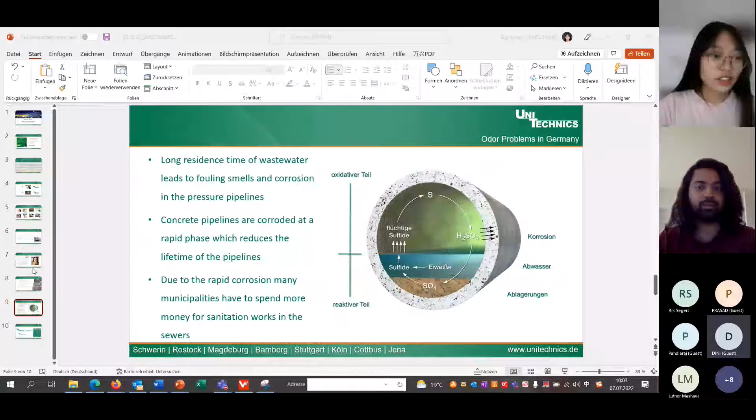Yeah, great. Actually, I have prepared a small presentation with some questions regarding today's topic. Let me share my screen so that we can learn from each other by looking at these questions.

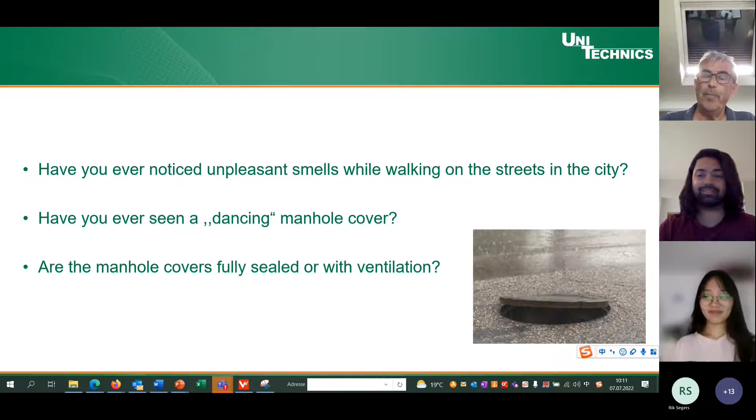But we never realized that we had a nice technology. We always think that maybe there's something more that we can do. I worked with Berliner Wasserbetriebe, and I was with Veolia for 14 years. When they got in there, we were always a leg ahead in which technology and how to do it, but I worked in England mostly, more than in France, and England was also at the forefront.

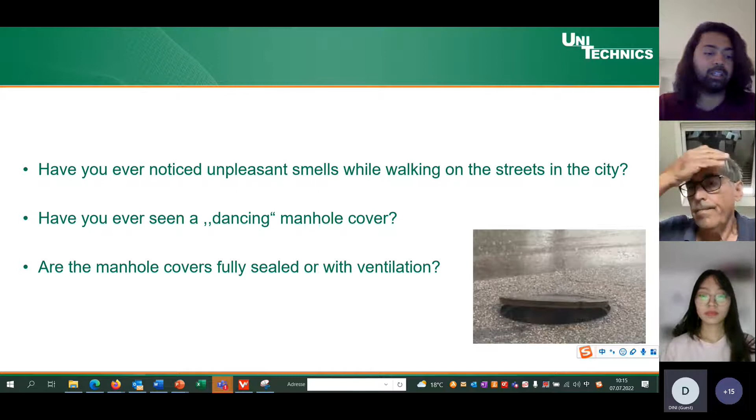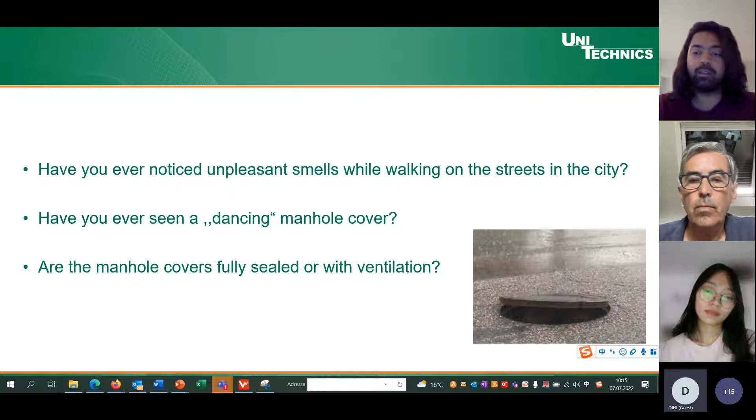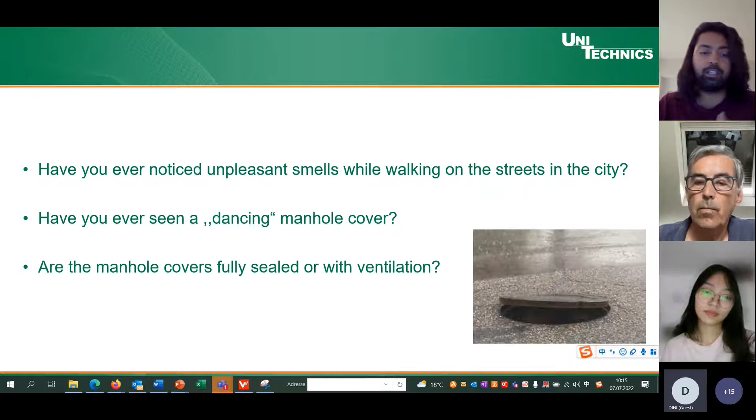So, like I said, we just want to know how it's going. Are there any other different methods that people are using? That's the basic approach in Germany - we mostly use dosing with a chemical, and now due to recent situations in the world, the chemical we use for dosing has become extremely costly. So it's very hard to do the dosing and have a financially good process suitable for the customers or for government organizations. So that's what we generally do in my company, in Germany.

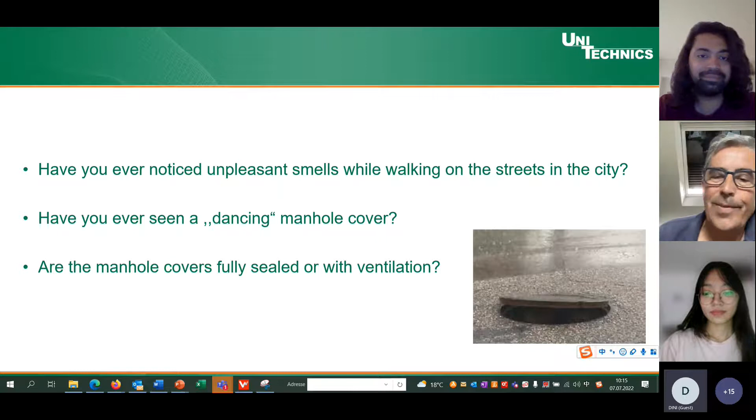So yes, and I have a question to you guys. Does any country have a hole in the manholes? I mean, holes in the top of the manhole cover, like in other countries. Anyone?

Yes, do you hear me? It's finished in quite a few countries, the hole. Now you just have a little thin hook - you get a little hole and you can lift the manhole without the hole. I do know a lot of areas where it's not allowed to have a hole, especially where you seal the manhole because of security issues around buildings against terrorism. It all started 20 years ago whenever an American president would come, or you had a NATO organization, you had to seal the manhole. Now in quite a few countries, from Romania to Trinidad to France, you've got sealed manholes in risky areas.

That's an interesting aspect, I've never thought about that. And then you have cities like Paris where you walk in the sewage in most areas because you've got the water pipes, the telecom pipes, and all that, so there is no manhole - well, limited manholes only in the side streets. But the security aspect is becoming fundamental.

Here are some photos I found in Germany. You can see all these manholes have some ventilation holes, nearly everywhere here. And where I come from, Wuhan - I think maybe everybody knows it now - in my city, I have never seen such a manhole cover with a ventilation hole.

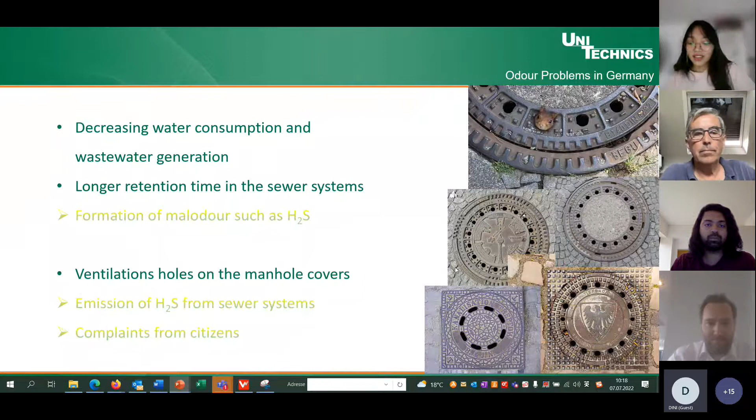With the ventilation hole, maybe you make one problem not as severe. Well, maybe you release one problem, but the other problem will get a little more severe. So it's a question of which problem is more important to us, and what we should do to somehow deal with both of them.

I never noticed you can have manholes without covers before. In my country, there are no manhole openings - we close them completely so the odor doesn't come out and give unpleasant experiences to people on the streets. Instead, we use huge flushes with air and sometimes water, cleaning the manholes completely once every few weeks or once a month, flushing the whole system from all the sewers and pressure pipes directly so it doesn't stay long, avoiding the need for open manholes while still getting aeration.

They also open the holes at night when no one is awake - that's another process I know of. But since it's a different country, the climatic conditions are different because it's very hot there, and some countries in Africa and maybe South America have similarly warm temperatures.

We learned in a previous wastewater talk that in some places in Morocco, they don't have manhole covers, and the sewer structures are slowly eroding and corroding inside. They're not allowed to have any person or food stalls near the manholes, because even when fully covered, you can still get the odor - the H2S has a huge impact, and it's sometimes very dangerous. In some countries they don't even allow you near that street because it's harmful for your health.

H2S is not the only main thing - it's the one everybody knows about that forms odor in sewers. But there are also new gases being studied, like methane and others forming in sewers these days. Methane is explosive and very dangerous, but most people don't have much knowledge about that in sewers. Our company is researching this, and we're finding things that surprised me - some gases are even more harmful than H2S. There are different gases more dangerous than H2S.

I realize we kind of already started the main topic of this episode.

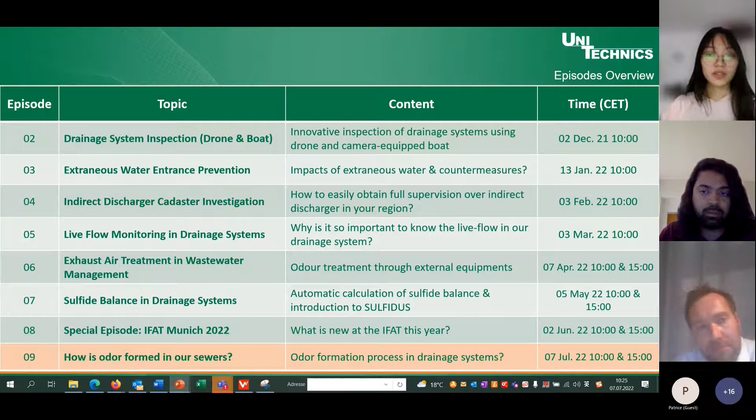And a short introduction, I prepared a little bit about our topic today. You want to share your screen? I can go in and say a little bit to our topic for today. We said we wanted to talk about how odors are created in sewers. That's the topic for today.

And you see a blank screen now. Hopefully all of you. It's a notepad, a paint document, the paint pad.

I wanted to have a little bit of interactive discussion with you guys, and wanted to ask you guys, where are odors created? Is it created at the moment in sewers? Who can tell me where do you think odors are created in sewers? Maybe write it in the chat, and I will make a drawing in this blank sheet, and we can discuss it a little bit.

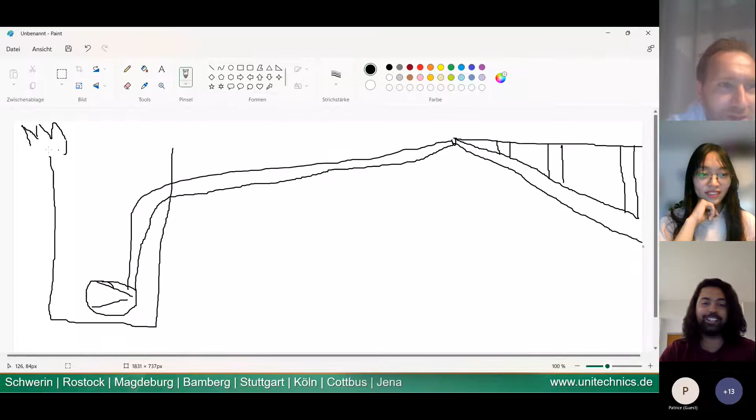Correct, and also you say here is maybe like a factory. My drawing is not that perfect, but that should be a factory - it's okay, you're not an artist, Klaus, it's fine. Okay, and the factory puts wastewater into the pumping station. And there can be smell, for example this water can smell, and the pumping station itself can smell, right?

And also with the pressure pipe, you mean like here, right? Yep, like from the manholes. Okay, so where is it now that the smell is created? So where is it created, how does it work, do you know? Does somebody have a clue how this gets created?

I mean, if you put in already stinking water, then that's like a chemical process in the industry. But most odor problems come from the sewer system itself. So basically, does anybody know how, for example, H2S - we already heard this - how is this created in the sewers? Does anybody have an idea here? He wants to share, maybe.

That's the goal for today, to together find out how it works, to make a concept and a drawing here, and then afterwards you all can print it out and hang it onto your wall and forever know how it works.

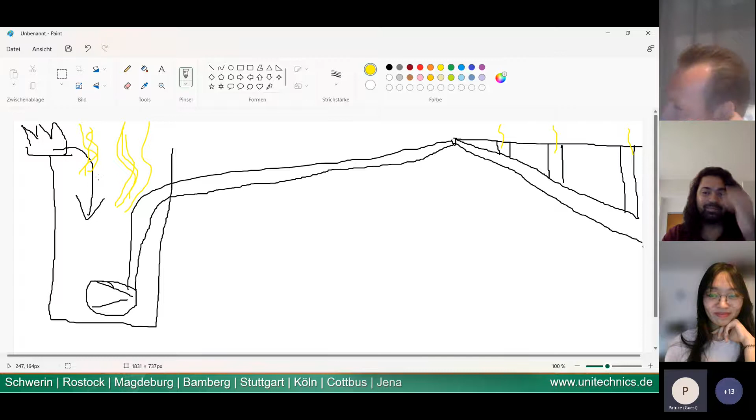Well, I like your optimism, Klaus, because I've been at it for quite a few years now. Like it's seaweed near the sewer, and sargassum, or we had a food factory dumping twice a day, and boom, H2SO4 is formed, and then when it's released to the air, it's H2S.

Right, let me explain a little bit how I do it, for engineers who don't work with this every day. For example, you have a pump that works like 10 times a day. It pumps from the low water level to the high water level, and all this water gets into the pipe. It's in the pipe here, then somehow there, and there's the water.

So where in the pipe is the H2S, the H2SO4, like you said, where is that created? Does anybody know?

Okay, then maybe I can discuss a little bit. So it can either be here in the pumping station, or it can be here in the pressure pipe. What do you think? Where is more H2S being created?

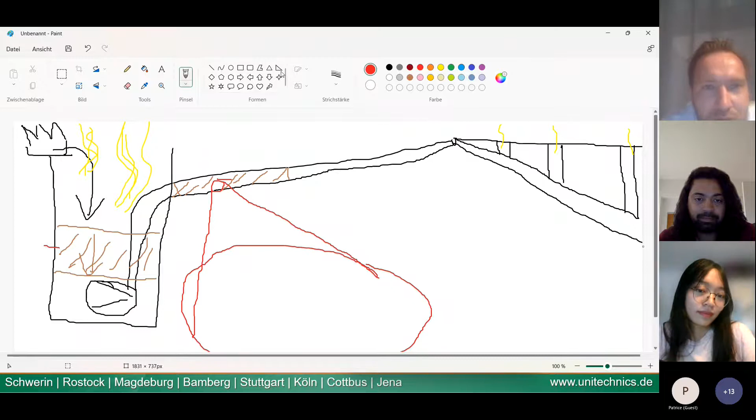Okay, I always do it like a looking glass, and then like an enhancement glass, a little bit. Most of the H2S is actually created in the pressure pipe, because you have a lot of surface in this long pipe with low water in it. And when you make a bigger image of this small issue here, then you have in the pipe something like this - sorry, it looks like a sperm, but it should be a bacteria.

Yeah, it's our bacteria. And what do these bacteria need? Can anybody say what a bacteria needs to work, to live? Food and oxygen, right?

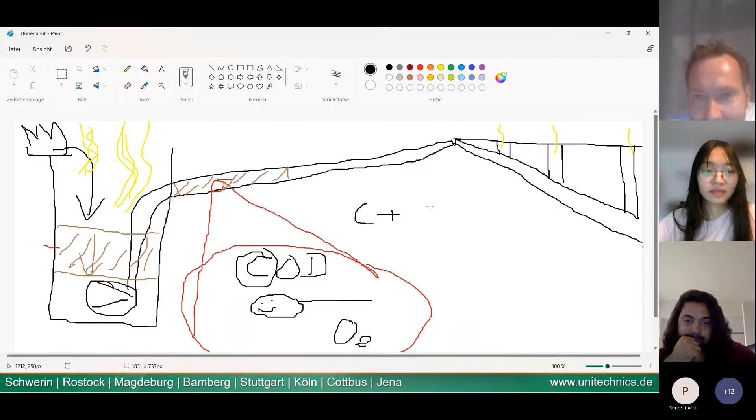Food, like humans, right? We also want to take sugars and other carbon-based stuff and take oxygen, and then we do oxidization, and we get CO2, right? So in the water we have, for example, COD - that's our measurement for carbon. Yeah, this is this issue here, carbon. And then we have O2 in the water - that's our oxygen. So it says C plus O2 equals CO2.

It becomes anaerobic. Right, the bacteria want to live. On the treatment plant you also have it - it's different bacteria, but for our sake let's say it's the same bacteria, and they want to live. So they need oxygen. So where can they get it from?

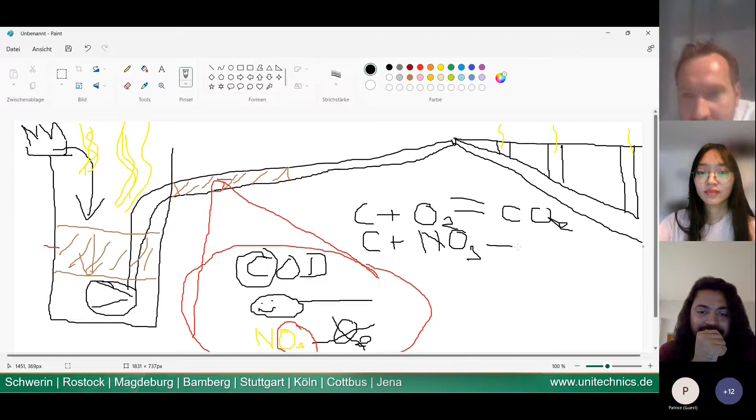In the treatment plant, you always have NO3, right? That's the nitrates. After the aeration, you have nitrates. NH4 gets to nitrates, and nitrates have this wonderful O here. Yeah, this wonderful O - that's what the bacteria need.

So the new reaction would be on the treatment plants basically the same. I mean, it's more complex, but it's the same. What happens? C plus NO3 equals CO2 plus N2, right?

Also no odors - we have a lot of gas. That's also the reason, actually, why we have air inside pressure pipes sometimes. We have this gas coming from the bacteria, right? So, but there's no odor. N2 is no odor creation.

But then we already know in sewage we don't have NO3, right? That's what would happen if we don't aerate enough our wastewater on the treatment plant. Then the bacteria don't have these NO3. Then they have what? SO4, sulfates. Again, there's a very good O here, and the bacteria like this O and take it, and then they have again C plus SO4 equals CO2 plus what?

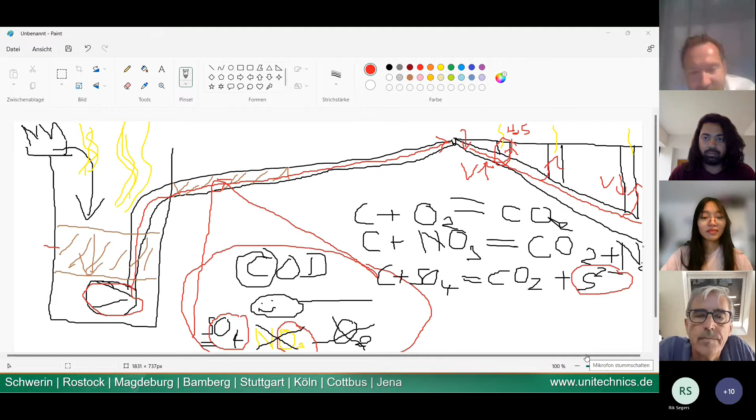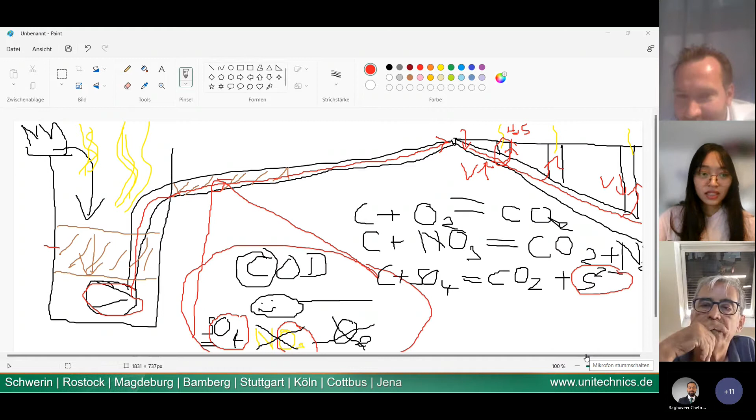So anybody else in our discussion round, do you have questions about this design? I think Mohammed Salam raised his hand. Come on, hello Mohammed, please you can just start talking. Hello, can you hear us? You can join the discussion whenever you want. Mohammed Salam? Hello? I think he can't hear us.

Okay, that's basically what I prepared for today. If we want to go deeper into this, Siqi has maybe some slides left for the presentation. When I wanted to get into this topic, I prepared something like the problem we have in Germany, or what brings our company into this topic.

Maybe I'll just give a short introduction. Here's a graph showing the development of water consumption per capita in Germany from 1990 to 2011. As you can see, it has been dropping for the last 20 years. So less water consumption means there's also less wastewater generation.

But the sewer system has been built there since long ago, and they were built in such a size that it is suitable for the consumption and generation of wastewater in the past, but is no longer suitable for now.

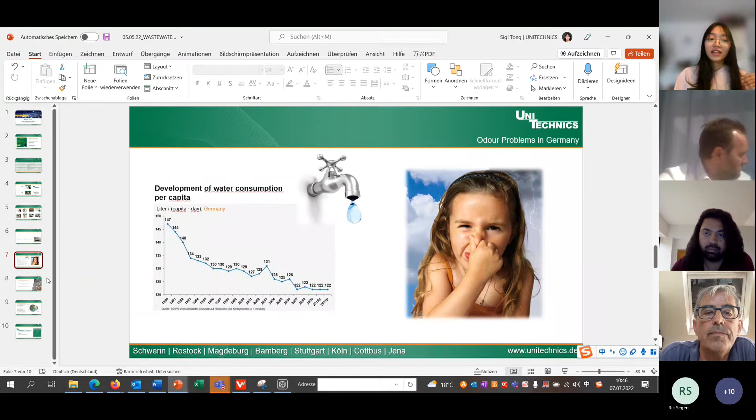So we still have this big size of the sewer systems, but much less wastewater flowing inside, which means it will stay inside for much longer time than in the past. And this longer retention time in the pipe system will create odor problems. That's also how our company got established, dealing with this in Eastern Germany in the past.

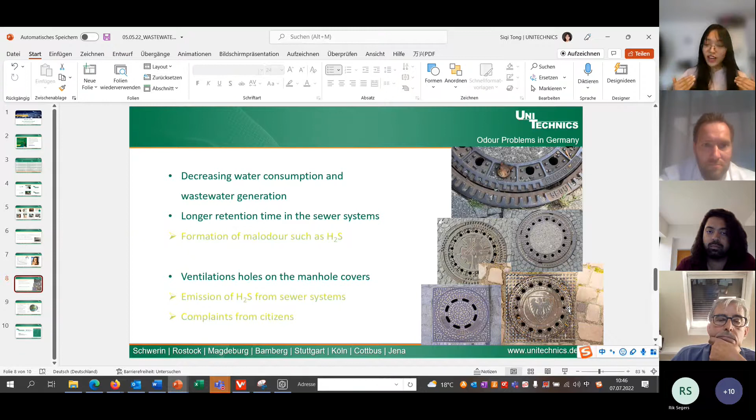As you can see here, we have these ventilation holes on the manhole covers. With decreasing water consumption and wastewater generation, there's longer retention time in the sewer systems, and that leads to the formation of malodours, such as H2S, which is maybe the most important of all these malodours. With these ventilation holes, we bring the problem which was in the sewer, underground and nobody noticed before, now above the ground.

All the malodours will emit from the sewer systems into the cities, and then we get complaints from citizens that they smell these unpleasant odors, and they complain to the government, saying you need to do something. Here's also a graph showing the theory of how this sulfur conversion happens in our sewers.

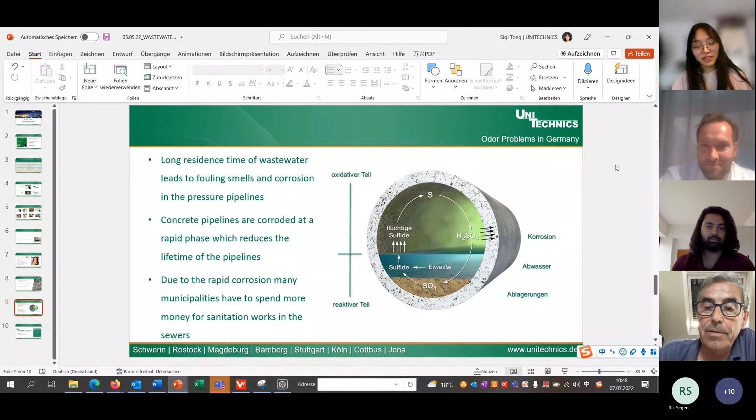Here's the water level, and at the bottom you can see the sludge that has been inside our pipes for a long time. Above the wastewater, there's also part of the air which is not totally filled. As Klaus explained before, we have sulfur inside our sewer systems, and it will convert to sulfuric acid, to sulfate, and also to sulfide at the end. During this process, it will corrode the concrete part of our sewer systems and also generate odors like H2S, which flow with the wastewater into our gravity pipes and finally emit out from our ventilation holes.

That's the slides I prepared just to get an introduction into this topic and explain the problems we have here.

I had a couple of things to add from what you said. It depends on the season also, because bacteria work better above 15 or 20 Celsius. Now we've got a problem when you reach 26, 30 degrees Celsius, like on the island, so the choice of bacteria depends on the season in Europe. Also there's another issue, anaerobic versus aerobic bacteria - we are now trying to promote bacteria which works in both cases, so it can be anaerobic from the lift station, and then when it's released, it's aerobic. Pricing depends a lot on where you buy them, it's a lot cheaper in some areas than others, and Africa is a place where they are really developing bacteria fast, but we have to be careful with bacteria and temperature. The temperature is always a very important factor in this process. We can imagine that in summer there will be more of this kind of odor problem than in winter, and in tropical regions this problem will also be more severe than in Nordic areas.

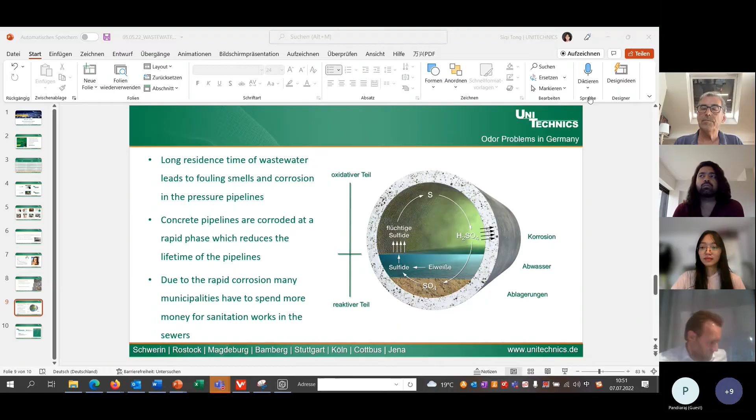So there is a small release all the time. As you say, the bacteria needs food and oxygen, so they need air, but they also need the sewage, and they will develop. If you have the right bacteria, you will just enhance the natural bacteria of the pipe, so they will develop naturally. You need to have the right combination, you cannot just buy bacteria off the shelf.

We need to dose. And when we were discussing the pressure pipes, then of course we get into trouble because at a certain pressure they don't like it. Give me a message afterwards, and we can talk, and I'll put you in the right direction. It's real cheap on top of it.

Okay, I've got now 2 years experience in St. Martin, where the temperature of the sewage is 28 to 30 degrees permanently, and the pressure is fairly high because one of the pipes we've been dealing with is 4.5 kilometers under pressure. So it's non-negligible, right? Yeah. I mean the sewers depend upon the country and they are different elevation as well, depending on many factors. Every location is different, in my opinion.